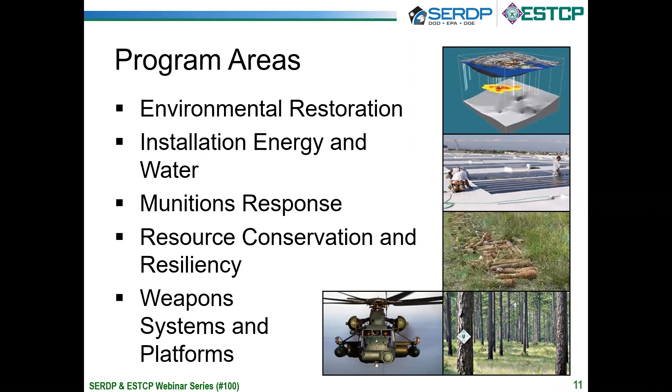Today's webinar on slide number 11 presents results from research and demonstration efforts conducted under 2 program areas: environmental restoration and weapons systems and platforms. Environmental restoration has 5 main areas of research, including contaminated groundwater, contaminants on DoD testing and training ranges, contaminated sediments, wastewater treatment, and risk assessment.

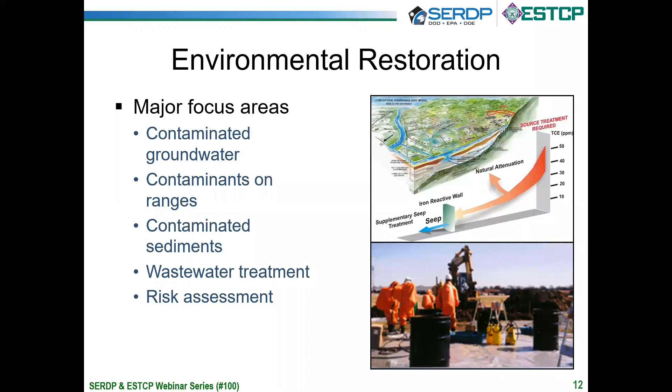Weapons systems and platforms on slide number 13 also has 5 major areas of research. Those include surface engineering and structural materials, energetic materials and munitions, noise and emissions, waste reduction and treatment in DoD operations, and lead-free electronics.

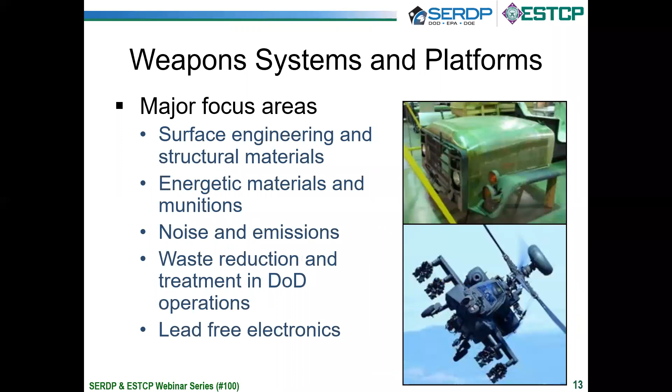On slide number 14, our webinar series highlights research and demonstration efforts from each of the 5 program areas. Upcoming webinars will cover a broad range of topics. You'll see an ER webinar coming up next week on high-resolution site characterization. On October 31st, we'll have a weapons systems and platforms webinar on sustainable coating systems for military platforms.

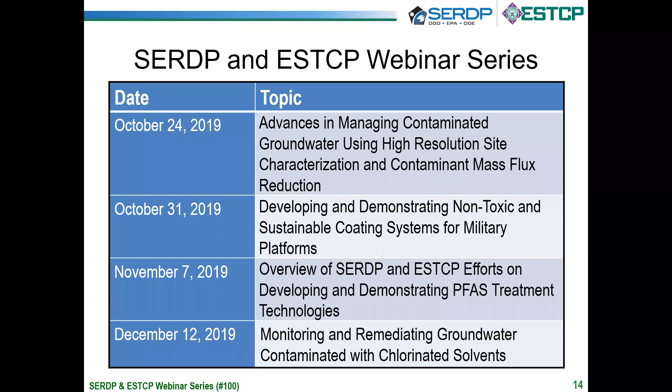On November 7th, we'll have another PFAS-related webinar on SERDP and ESTCP efforts on developing and demonstrating PFAS treatment technologies. And we'll conclude the 2019 webinar series with another ER webinar in December on monitoring and treating groundwater contaminated with chlorinated solvents. On slide 15, you can find additional information about upcoming webinars at this link.

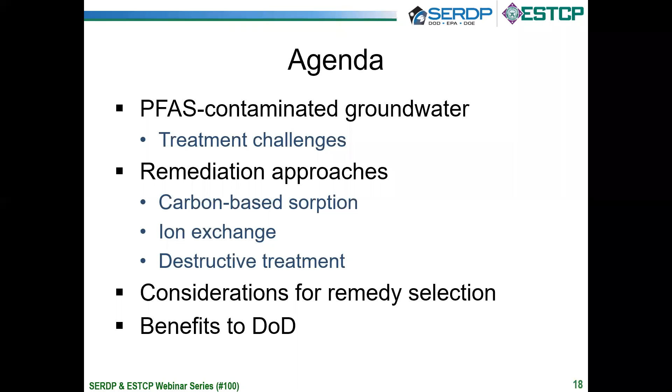Treating PFAS is particularly challenging relative to the treatment of more traditional contaminants for several reasons. First, the chemical properties of PFAS make them tricky. The carbon-fluorine bond is one of the strongest bonds in nature and requires significant energy to break. Also, PFAS are surface active because of their hydrophilic heads and hydrophobic tails, so their partitioning and behavior are difficult to predict. They're also very soluble and don't transfer as easily to air or solid surfaces as many contaminants we're used to working with.

Also, target PFAS are typically present amongst a suite of contaminants at a site, whether with many of the over 3,000 other PFAS compounds or present with other types of co-contaminants. The broad suite of PFAS compounds also contain highly varied properties, so an approach that is good for one compound or group of PFAS compounds may not be particularly effective for others.

Finally, precursors are a challenge to treatment. Precursors are some of the larger chain PFAS compounds that are typically present at AFFF and other PFAS contaminated sites. They're partially degradable and can break down into some of the same compounds we're targeting to treat. Additionally, most treatment processes will be affected by the presence and concentration of precursors, and this is difficult to manage, particularly because many can't even be identified or quantified with current standard analytical approaches due to the lack of available reference standards.

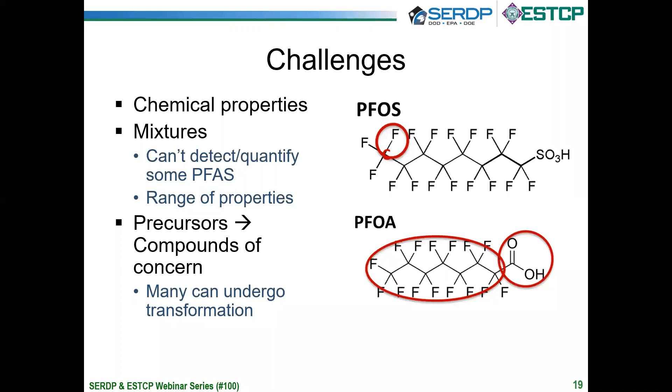We have three big picture options to treat PFAS-contaminated groundwater. We can immobilize them in the subsurface, typically using sorptive amendments. We can separate them from source water using processes like sorption and membrane separation as examples, or we can destroy them, ideally generating innocuous byproducts.

Currently, off-site incineration is the most common and readily available destructive approach. However, several other options are under development, many of which may be implementable on site, which would help minimize liability and transportation costs. A favorable approach to manage PFAS-contaminated groundwater is a combined remedy, where separation processes are used to concentrate PFAS, and the concentrate is then destroyed. In this approach, the limitations of one are overcome by the advantages of the other toward improved efficiency of treatment.

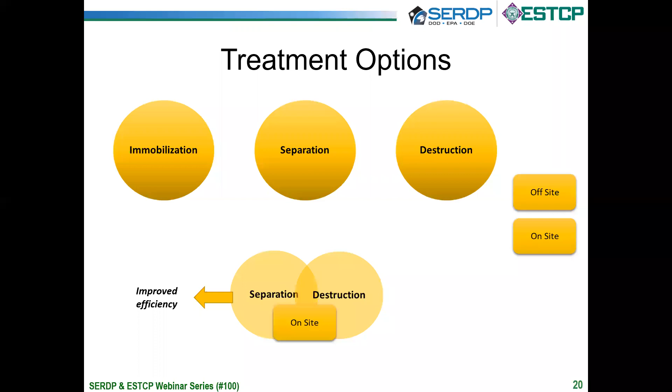Looking at examples of these options in more detail, separation can be achieved by filtration, coagulation, sorption, and ion exchange. Sorption using granular activated carbon, or GAC, and ion exchange using both single-use and regenerable resins are currently the most common. However, new developments are increasing the feasibility and decreasing the cost of filtration and coagulation approaches.

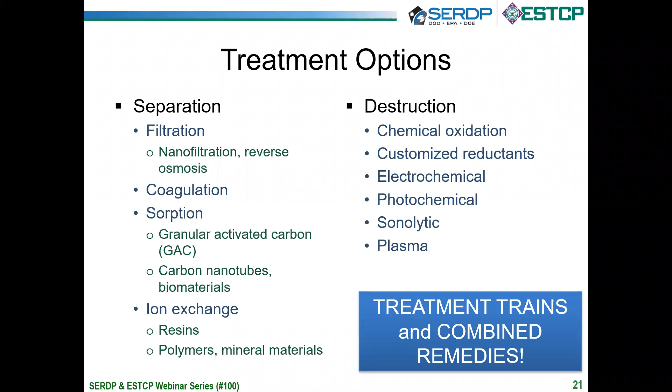There are an array of destructive approaches, most of which are currently under development, including oxidation, reduction, electro and photochemical, sonolytic, and plasma treatment. Most of these are energy demanding, so there is indeed significant value in a pre-treatment concentration step as a treatment train or a combined remedy.

The goal is to develop approaches that are not only effective at treating PFAS, but to do so with the greatest efficiency, as we know that this is a large-scale and extensive problem. I think our future holds an array of options to choose from, ultimately based on site-specific factors and cost implications.

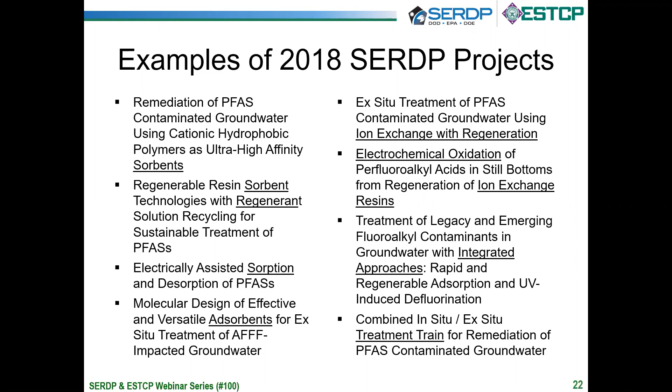I'm going to go through a few examples and considerations for some of the key approaches that we currently have available, as well as some example approaches coming down the pipeline.

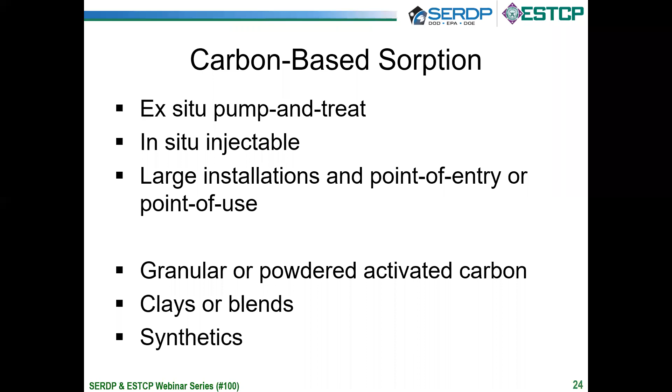As I mentioned, treatment using activated carbon is currently most common. Carbon-based treatment systems are versatile. They're implementable for both large and small-scale systems, as well as both in situ and ex situ. There are an array of carbon sources out there, and new blends, as well as synthetic media, are under testing and development toward improving sorption capacity.

Not all carbon behaves the same under the wide range of contaminant, co-contaminant, and geochemical conditions of different sites. Therefore, treatability testing with site-specific groundwater and the specific carbon to be used on site is very important. Additionally, not all PFAS compounds behave the same. Shorter chain compounds are more difficult to remove by separation than larger chain compounds, for example.

Sorption behavior for PFAS is less predictable overall than it is for other types of contaminants. For example, one challenge is the fact that PFAS compounds can form micelles and hemimicelles even at concentrations well below their critical micelle concentration. Sometimes this can aid and enhance sorption, while other times it can inhibit it, depending on the carbon properties. Many researchers are working on improved understanding and prediction of the sorption and fate of the broad suite of PFAS compounds.

It's possible for GAC to be reused. The GAC can be shipped back to the vendor and reactivated by heating it to 1300 degrees Fahrenheit. This same GAC is then returned to the customer for reuse. Many researchers and practitioners are also working on alternative on-site approaches to regenerate GAC for its reuse.

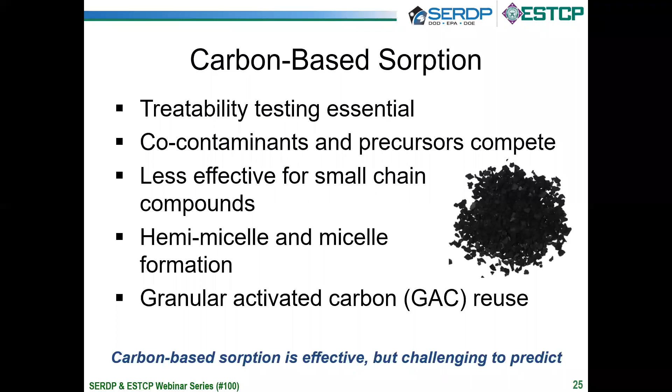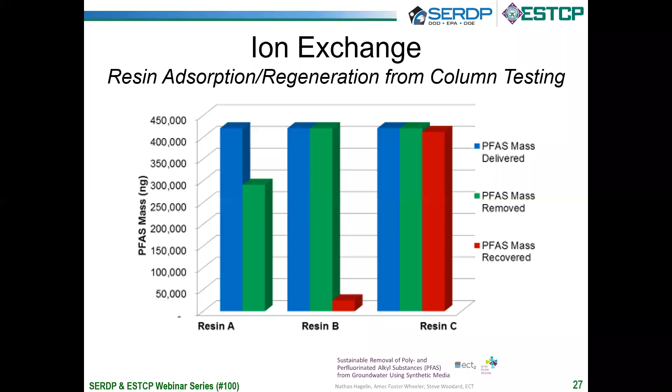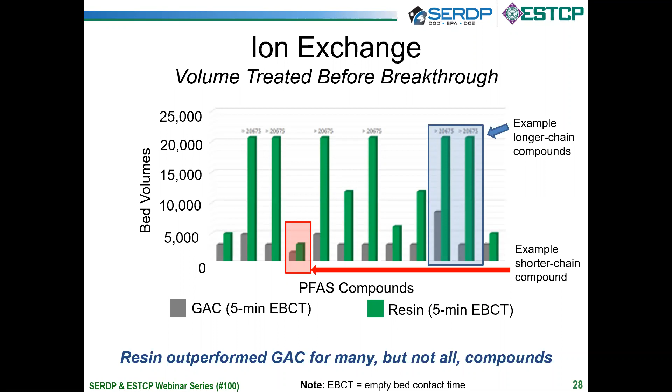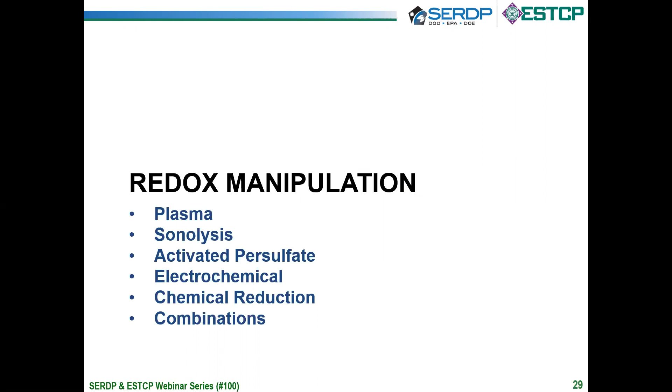The majority of technologies that I mentioned at the beginning of the presentation that destroy PFAS compounds actually do so by manipulating redox conditions in a very aggressive way. For example, plasma treatment uses electricity to convert water into a mixture of highly reactive species, a key one being aqueous electrons, which are very aggressive reactants capable of destroying even the most recalcitrant PFAS compounds.

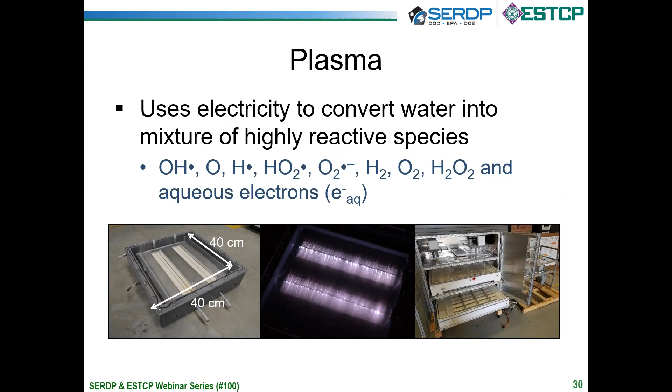My colleagues at Clarkson have designed, built, and tested a plasma treatment system, different scales of which you see here in the photos, with the one on the farthest right being a deployable field scale unit. My colleagues Tom Holsen and Selma Mededovic and their research group have treated a broad range of contaminated site groundwater samples using their plasma treatment system.

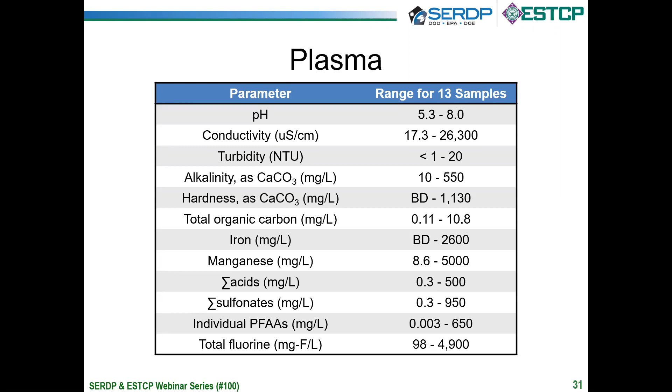Another approach we're working on at Clarkson is an in situ sonolytic treatment approach. We've developed a reactor that gets emplaced within a horizontal well in the subsurface. Horizontal wells passively capture water. As the path of least resistance for water to flow, a well that is less than 1 foot in diameter can capture water in a treatment zone of up to 50 feet or more, requiring no pumping at all. The idea is that water flows into the reactor, is treated, and then clean water exits the well.

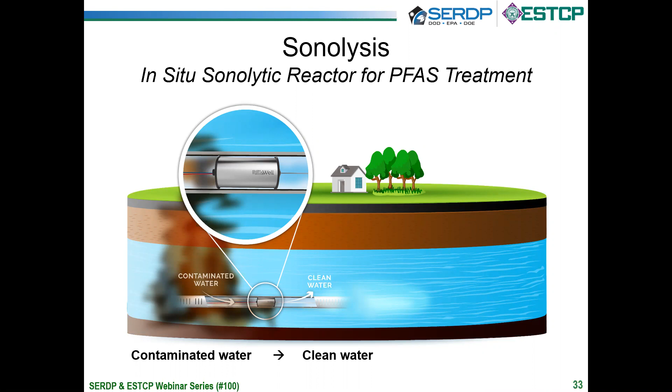While treatment effectiveness varies as a function of site conditions, effective treatment is achievable given a long enough treatment time. The key site parameter impacting treatment time is actually not the target compound concentration, but is the concentration of precursors that are also present in the water.

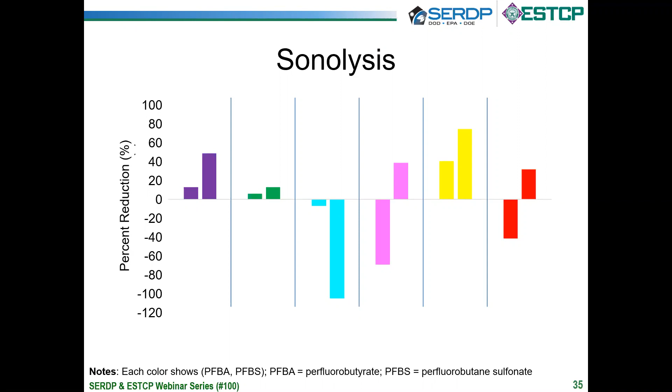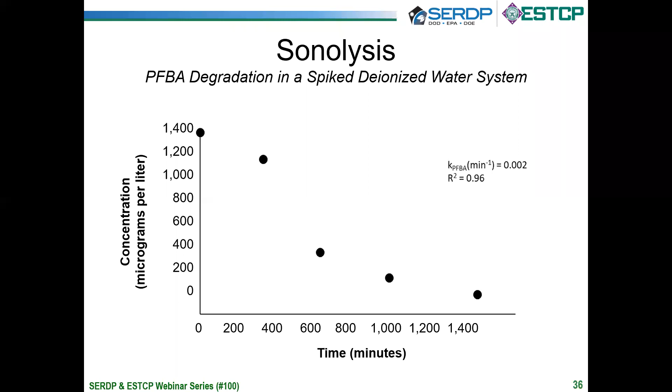Because of their generation as intermediates, we wanted to confirm treatment of these smaller chain compounds, that they're being destroyed even while being generated as intermediates. The example for treatment of PFBA, one of the hardest to treat compounds, is shown here. So we do indeed treat these smaller chain compounds in this sonolytic system.

Plasma and sonolysis are just a couple of the destructive treatment approaches under development. Others include electrochemical, photochemical, reductive, and oxidative approaches. These are described in more detail in the reference that you see shown at the bottom of the slide, and they'll also be summarized in the upcoming ITRC guidance document soon to come out.

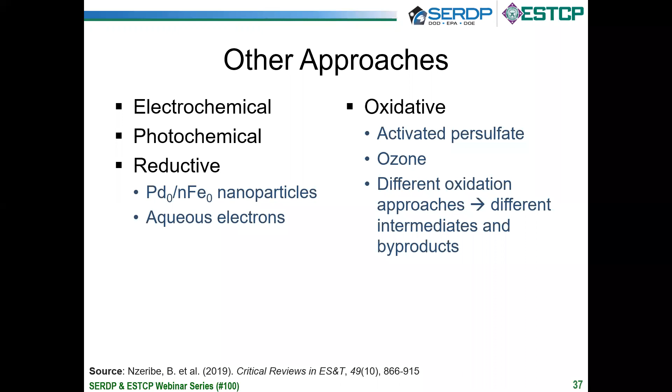It's important to look for potential byproducts and to confirm the fate of your target compounds. It's helpful to measure the increases and decreases in reaction intermediates over time. We wouldn't want to write off technologies that generate reaction intermediates that do continue to degrade over time by assuming that these are ultimate byproducts.

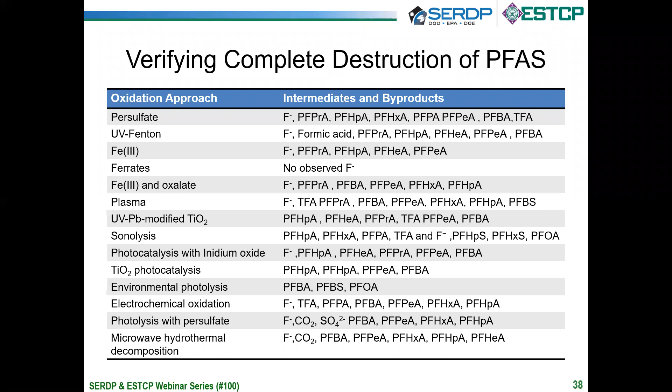I've mentioned the value of treatment trains a couple of times. One example I want to highlight is a SERDP project that we at Clarkson are working on with our colleagues at Texas Tech, ECT2, and Wood. We're using traditional oxidative approaches to evaluate precursor transformation in situ with the goal of reducing or eliminating them as

a long-term source of PFAS compounds of concern. This is shown here as Part A, in situ treatment, followed by Part B, pump and treat using a regenerable ion exchange resin. Our goal is to not only reuse the resin, but also to reuse the solution used to regenerate it. Once separated, the concentrated waste stream is then treated by plasma. This is a fully on-site process that results in almost no post-treatment waste stream to manage.

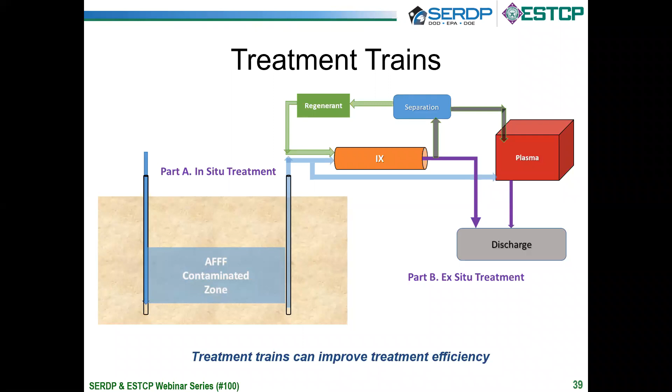For Part A in situ, we'll be testing three different oxidative approaches for precursor treatment: persulfate oxidation, oxygen sparging, and slow release oxygen. For Part B, ion exchange, we're evaluating the effectiveness of different regenerant solutions in pulling PFAS back off of the resin. We're also testing several approaches to separate the PFAS from the regenerant solution so that it can be reused.

For the plasma treatment component, we're comparing the efficiency of treating straight contaminated groundwater to that for the concentrated ion exchange residue and also the pre-treated oxidized groundwater. The ultimate goal is to couple the most efficient components of this integrated treatment process and assess what the technical and cost challenges may be at full scale.

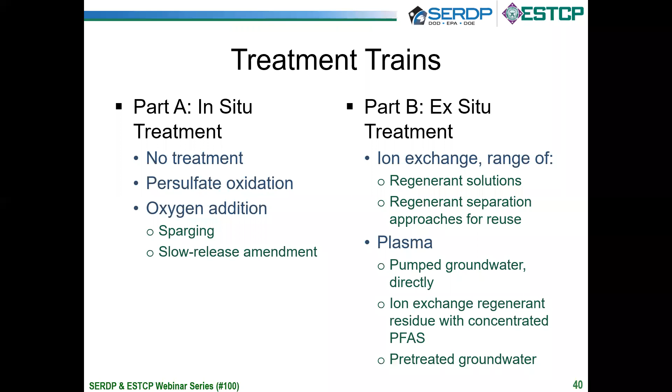So, summarizing the challenges and limitations of PFAS treatment: PFAS are hard to treat because they're present in mixtures, and because precursors impact treatment efficiency and can turn into our target compounds. Many current treatment processes ultimately result in a materials waste stream, such as GAC or single-use resin treatment, which then must be managed as a hazardous waste.

For destructive approaches, incomplete mineralization must be avoided, and we need to identify and advance lower energy treatment systems. Also, we need more examples of field-scale implementation of both in situ and ex situ approaches.

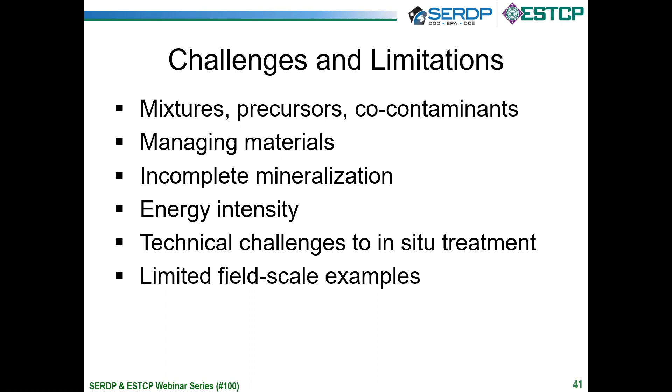When selecting potential treatment options for a site, there are a few key considerations. Does the approach rely on immobilization? And if so, to what extent can immobilization be verified to be irreversible? Does the approach rely on separation? If so, how will the separated PFAS be managed? What are the implications of this management plan? Can removal efficiency be improved at a reasonable cost?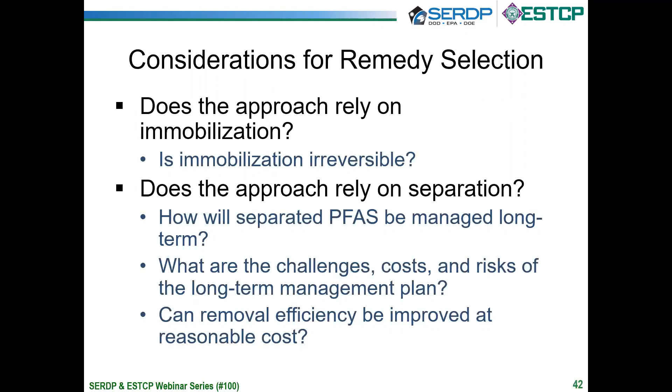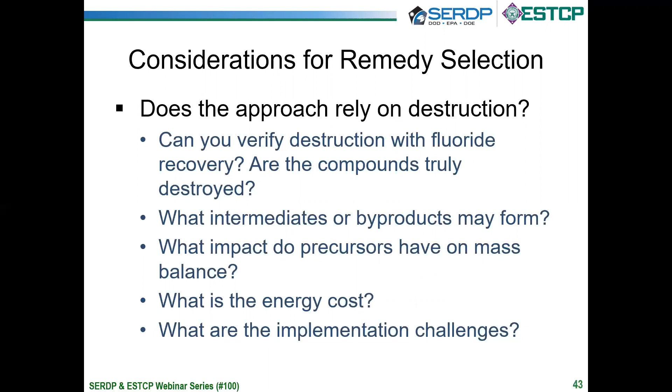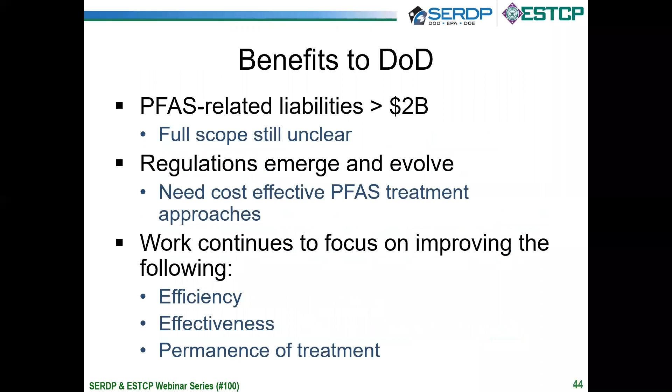Thank you so much for your time and attention.

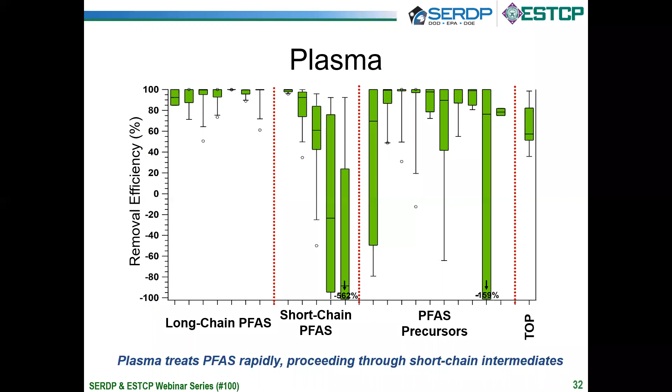Yes, this is a recent publication by my colleagues. I don't have that at my fingertips right now, but I would be more than happy to provide you with that information if you send me an email or give me a call. Great, thank you. And maybe one last question before we transition to the next speaker, and not to worry, we will get back to Michelle in the final Q&A.

We're doing really well on time. With regards to, you mentioned that you would recommend activated carbon or ion exchange resins to treat PFAS, and that you recommend treatability studies with site-specific media from the contaminated site - do you have any experience, and can you speak to how frequently carbon or ion exchange resins must be changed out, especially compared to treatment systems that are treating conventional contaminants versus PFAS?

Yeah, that's a really good question. It is a very site-specific answer, and that is the primary purpose of doing the treatability tests. What I'm hearing is, you know, a year, but I've also heard less than that, and I've also heard longer than that.

I think it can vary. Generally speaking, it's more rapid change out than a lot of contaminants, because PFAS tend to be less sorptive than other contaminants. So I do think the change out is more frequent than what we may be used to with traditional contaminants.

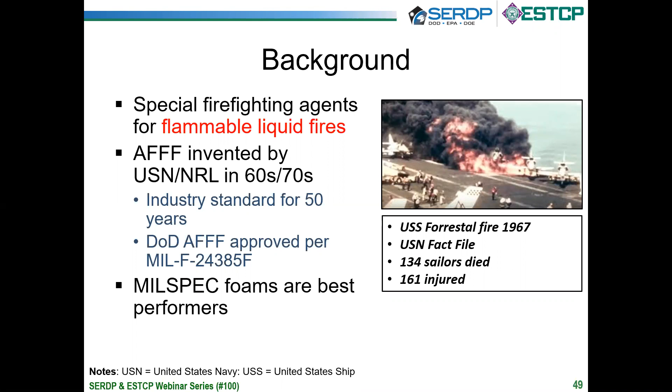The takeaway from the event was the DoD needed an agent that could rapidly extinguish flammable liquid fires to prevent ordnance cook-off in a scenario like this. That basically set the bar for mil-spec foams: fires needed to be extinguished in less than a minute to prevent ordnance cook-off. That requirement is probably the most strict out of all the approval tests today, and as a result, the mil-spec approved foams have always been the best performer because they've been tested to higher standards than other industries test foams in general.

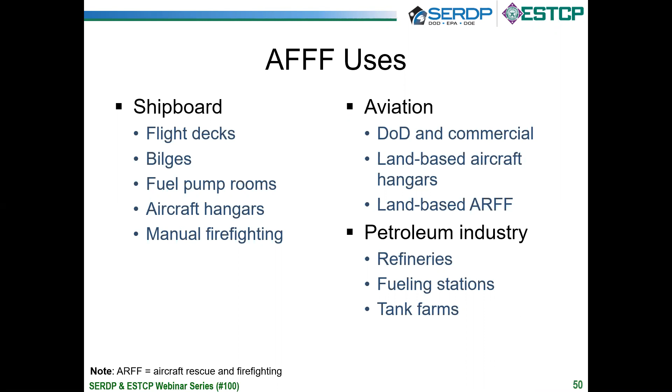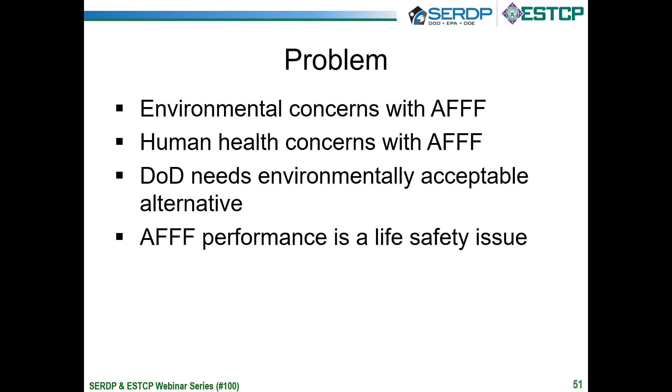I wanted to make a point that we need to be careful about replacing AFFF, because the use of a firefighting agent in general is a life safety issue. We need to make sure we don't compromise performance too much while addressing these other concerns. So the ultimate objective of our program is to identify an environmentally acceptable alternative. I think we're going to get there—I doubt it on this particular test program, but we'll definitely be well on our way. Being able to quantify the capabilities of the available alternatives, the state of the art today, and start a database on that, is a very good first step in understanding what the next step would be if AFFF becomes limited use throughout the industry.

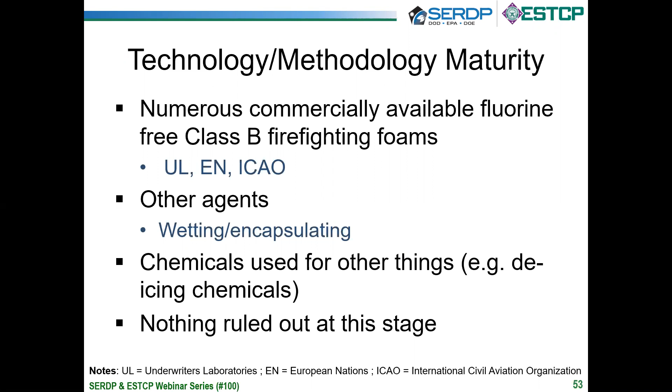As far as the maturity of environmentally friendly fluorine-free foams, there are numerous commercially available fluorine-free foams out there today, approved to UL 162, British standard EN 1568, and ICAO, the International Civil Aviation Organization. So in some respects they're ahead of DOD in getting foams out there. In our assessment, we're looking at those foams as well as other agents like wetting agents and encapsulating agents that have shown reasonably well against flammable liquid pool fires. We're even thinking outside the box, looking at other chemicals like those used to suppress grease fires in kitchens, or de-icing chemicals like aqueous potassium acetate, as an additive—nothing's off the table at this point. Let's just see how well all of these potential candidates can do.

Our approach consists of six tasks: a literature search, an environmental analysis to down-select agents for testing, then real scale fire testing, ranking the capabilities from that testing, and then going back to approval scale tests to see how they do. Ultimately we'll document the entire program in an all-encompassing final report with lessons learned and recommendations for the future. We're also bringing in end users and subject matter experts to help us assess the capabilities of these agents.

As an interesting point, I wanted to emphasize that we're running real scale fire tests before we're actually running the approval scale fire tests. That's how AFFF was invented way back in the day, over 50 years ago—the tests were all done on real scales before the development of the small scale test.

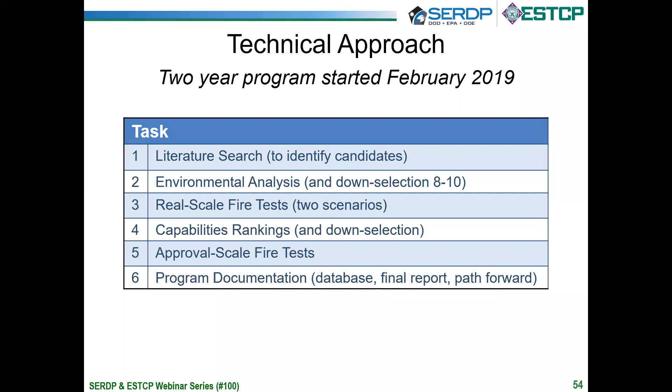There's so much focus now on getting an agent to pass the small scale test, and we may have lost the direct connection between the small scale tests and how well they do in an actual real scale situation. So that's why we flipped the order on this, and it actually makes sense if you think about it going forward.

As far as task one, our literature search, which is completed, we did a comprehensive literature review on a lot of different applications and uses, and we've identified approximately 30 potential candidates for testing. 12 of them are UL-listed fluorine-free foams, 9 have either British or European standard test approvals or ICAO type test approvals, 8 are wetting agents or encapsulating agents, and 3 or 4 are SERDP ESTCP candidates, specific compounds developed with SERDP ESTCP funding prior to this program.

Most of these are all added with water the same way as you would with AFFF, so it's going to be a very high concentration of water with an additive. But all in all, it's going to be very interesting to see how this all plays out as far as capabilities are concerned.

Now all of the information we collected during task one, we've inputted into a giant spreadsheet with a row for each of these potential agents. In that row we have everything linked to test reports, approvals, MSDS sheets, SDS sheets, recommendations, things like that. So it's a very all-encompassing data set to start this whole process with.

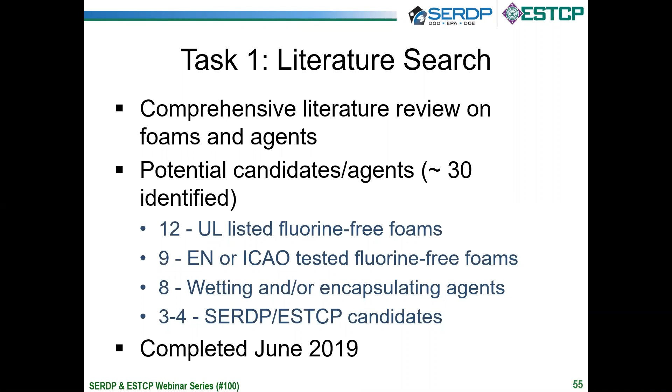The environmental analysis was also quickly done, based on the chemical compositions as provided to us from the manufacturers. It was basically a go, no-go type of assessment, and they all went through that first process pretty well. We're going to ultimately circle back and do life cycle assessments on the ones that look very, very good as far as firefighting capabilities.

Task 3 is our real scale fire test program. We're going to do 2 scenarios during task 3: a fixed discharge system, overhead sprinkling type system, and a manual firefighting type of scenario.

Both of those are going to be what I would refer to as medium scale, but to the novice person, they would feel like large scale. We're typically going to aim for about a 400 square foot pool fire. We're going to make these fires with representative fuels like JP5 or F76 to do our first screening, as opposed to test fuels like heptane. We're actually going to use the real fuels to put those fire sizes in perspective.

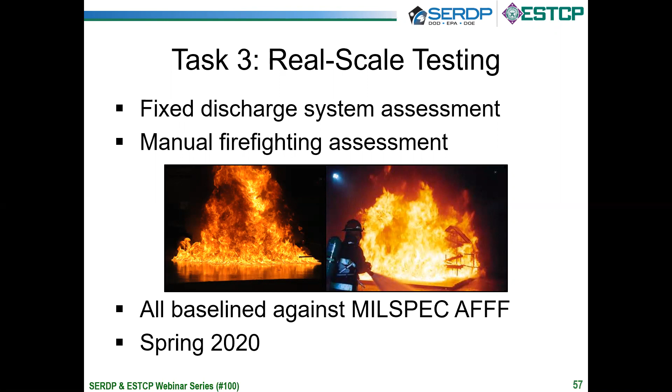So a 20 by 20 foot pool fire will give you a flame height of about 4 or 5 stories tall. So from a novice standpoint, that's a pretty big fire, and from those standing next to it, it would seem large as well. From an AFFF perspective, we're going to use AFFF, mil-spec AFFF, as a baseline comparison for all the agents we're testing during this program.

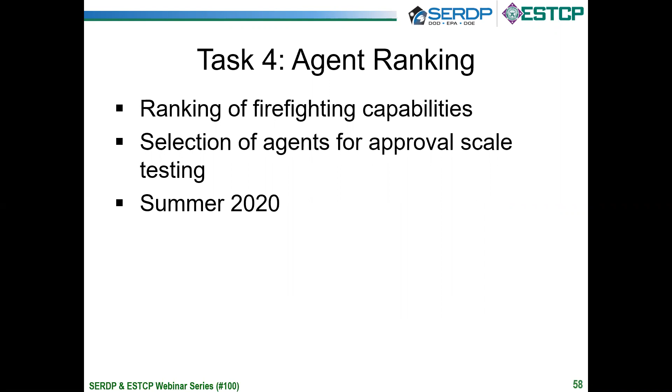Once we finish our first round of fire tests, which will be real scale, we're going to rank the capabilities, and we are going to down select some to go to smaller scale to try to develop the link between the small scale and the large scale. It's going to basically take a very poor performance to eliminate an agent from going back to small scale.

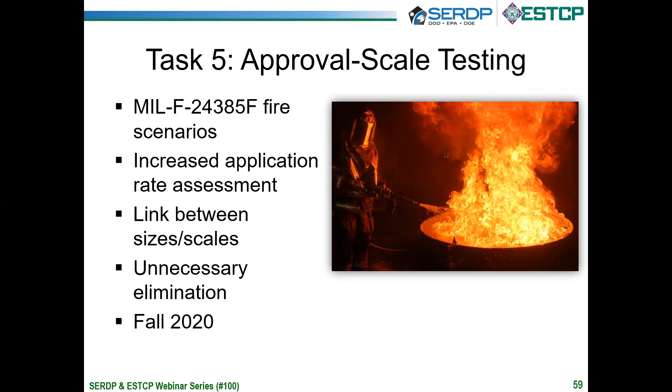During the small scale test, we're going to test the candidate agents against the 28 square foot pool and the 50 square foot pool fire that's included in the mil spec. We're going to start with 2 gallons a minute, the standard flow rate for the mil spec test, and increase the flow rate until we're able to pass that. So again, we're going to try to develop some kind of link between the small scale capabilities, as shown in the approval type size testing using the mil spec as the basis, to the actual large scale testing we conduct prior to that.

At the end, we're going to document all of the tests that we've run, have a video database, as well as that large spreadsheet which identifies all of the agents. The NRL is going to be the keeper of the database, and we hope to grow that database as more technologies become available. We're going to bring in end users and subject matter experts to chime in on what we think the capabilities should be for these foams.

But ultimately, we're going to have to decide going forward, whether it's now or somewhere down the road, if AFFF does indeed go away, how good is good enough. I'm going to use a lot of these technical experts as a backboard or sounding board to figure out what makes the most sense as far as the path forward.

So the ultimate benefit to DoD is a database on the capabilities of all the commercially available AFFF alternatives that we've identified to date. It's a logical first step. We'll have a link, hopefully, between the real scale and the approval scale tests again, because over the past 50 years, since AFFF was originally developed, the mil spec link has been blurred, if not completely lost, the understanding of how well that actually links.

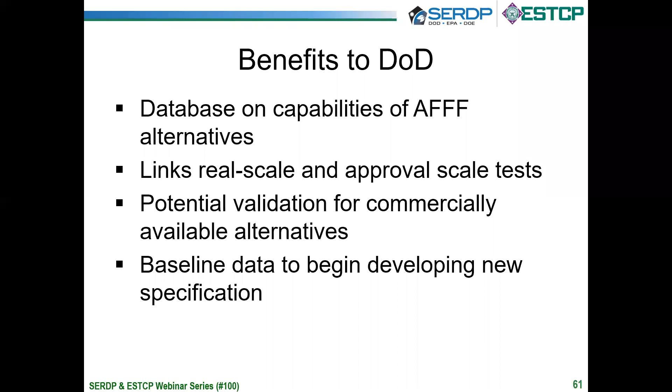And then ultimately going forward, we could indeed use this database and the information that we collect during some of the testing to develop a new mil spec for approving fluorine-free foams, if we end up going that way.

So as far as where we are in the program, we've completed tasks 1 and 2, the literature search and the environmental analysis. The real scale tests are scheduled for the spring. We'll rank the capabilities in the summer. Repeat the small scale tests, or run the small scale tests, in the fall, and hopefully complete the entire program by the end of the 2020 calendar year, with a final presentation and documentation package completed in early 2021.

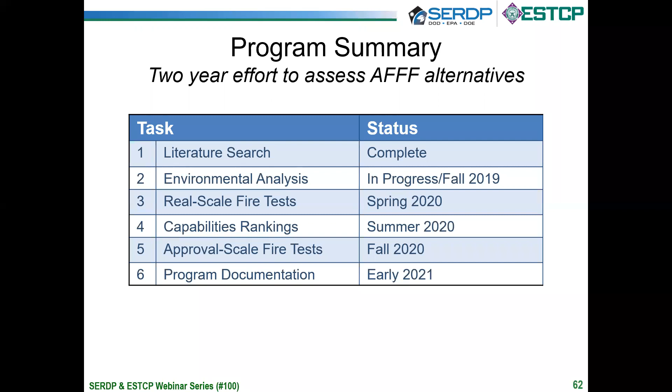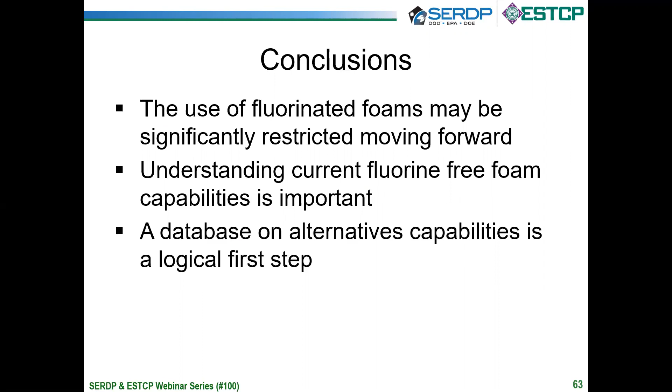So as a high-level summary conclusion: the use of fluorinated foams may be significantly restricted moving forward. Our understanding of the capabilities of fluorine-free foams needs to be developed. A database needs to be established as a logical first step. And that's kind of what we have proposed here, and that's our program to date.

I need to acknowledge John Farley, co-PI, principal investigator on this program. John works for the Naval Research Lab. He's the director of fire and test operations. He has 35 years of experience, about 20 years of owning the mil spec test and the QPL list for foams. John and I work on a daily basis to assess these. And as an interesting data point for you guys, the way I got into this business 35, 40 years ago was the fact that my next door neighbor, Jake Jablonski, invented AFFF.